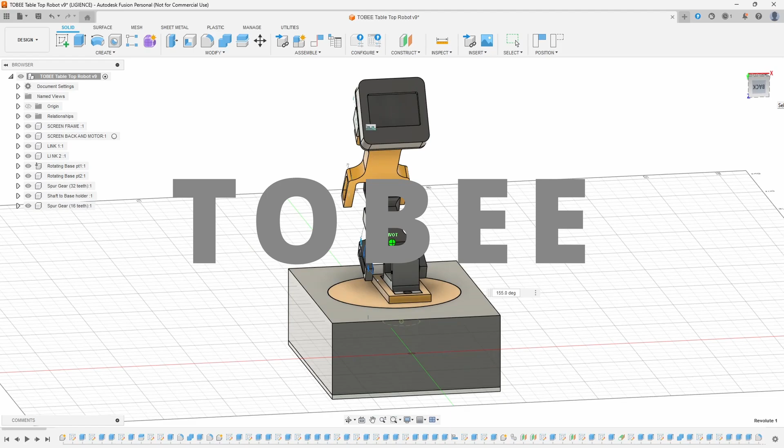Presenting TOBEE, your tabletop robot. Not yet in the flesh, of course. I initially wanted to build my very own Emo robot, but after some financial and part availability constraints, I decided to chill out on that for now. TOBEE, which is a tabletop companion robot, is designed to be a 2 degrees of freedom robot with a rotating base and a screen as an end effector.

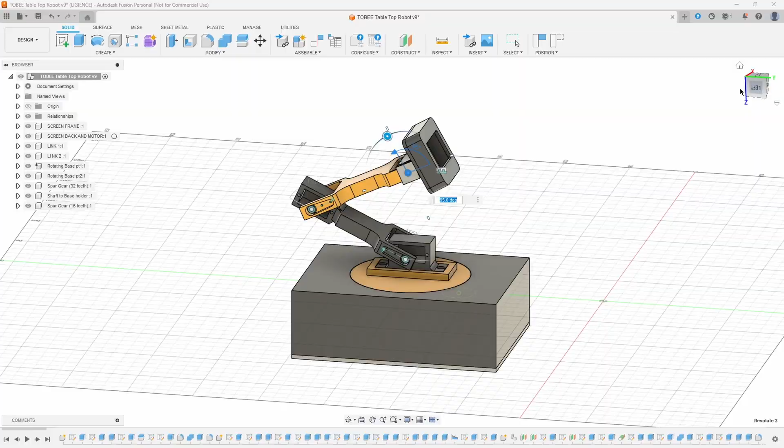TOBEE will have either eyes that react to the controls you manually give to the robot, similar to the Emo robot, or you could also just program in your friend's favorite quotes to motivate them, in times of play, I guess, with the robot.

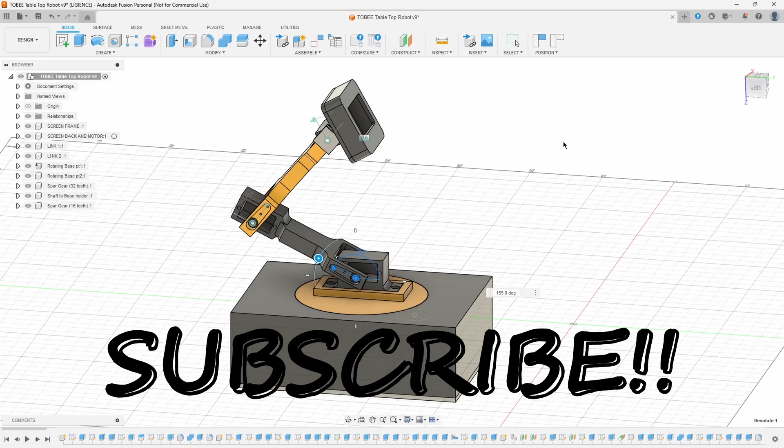Now that TOBEE V1 has been established, let's go over design considerations and constraints. Starting off the project, I made a hand-drawn draft detailing the joint positions and considering the materials I'll need. I ended up with this crappy looking draft and started working with that.

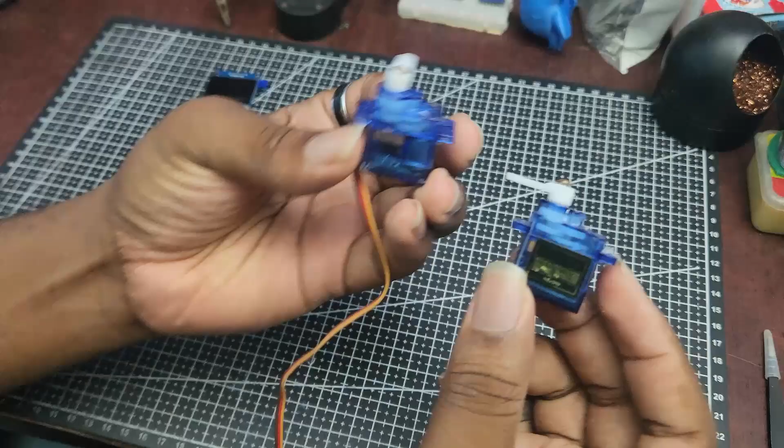In order to have a valid design, I laid out all the different components, which included a 1.3-inch OLED screen, 2 N20 motors, one for the rotating base and the other to rotate the screen, 2 SG90 servos to actuate the joints, an Arduino Nano ripped from an old project remote I made a long time ago, 4 potentiometers,

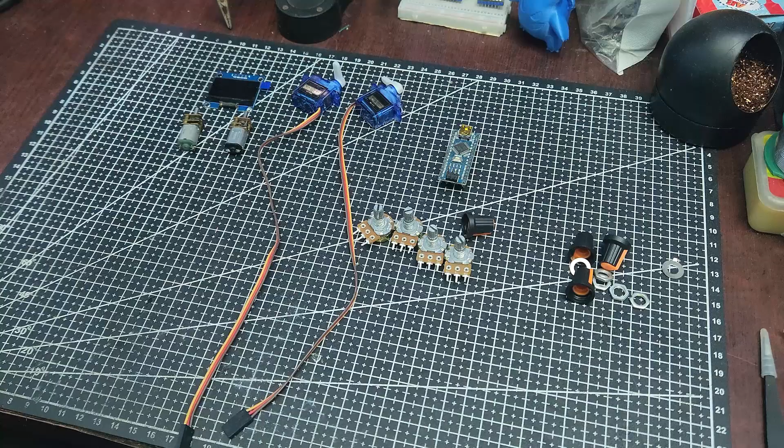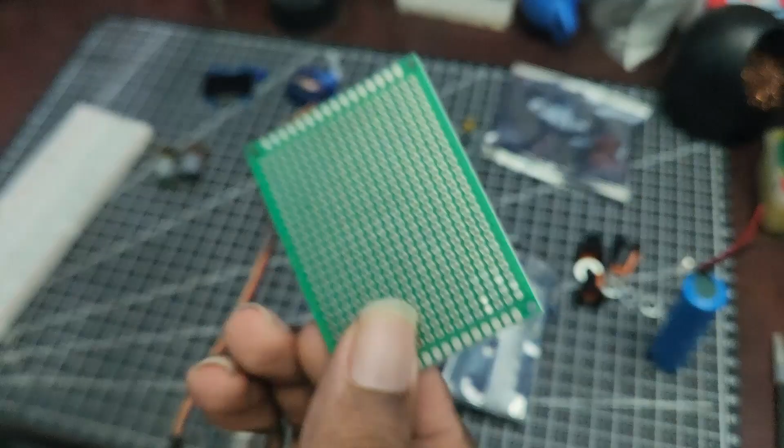an L298N small form factor motor driver I had laying around, a Type-C port, a charge and discharge module for the LiPo battery, a switch, a small piece of Vero board, some servo connector wires and some headers.

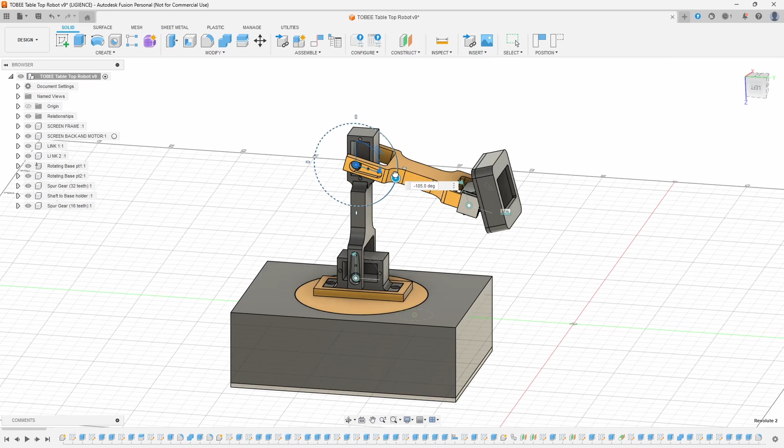With this sorted out comes the next problem, of course, the design. Normally I would design test parts, print them and then use the measurements for parts that fit to design the actual final product. But instead, I went ahead and did the final design. This was with the intent that I could just adjust the dimensions after I print the part in case it didn't fit and I would just be okay. Foreshadowing, let's see. Nonetheless, I popped open Fusion 360 and got to work.

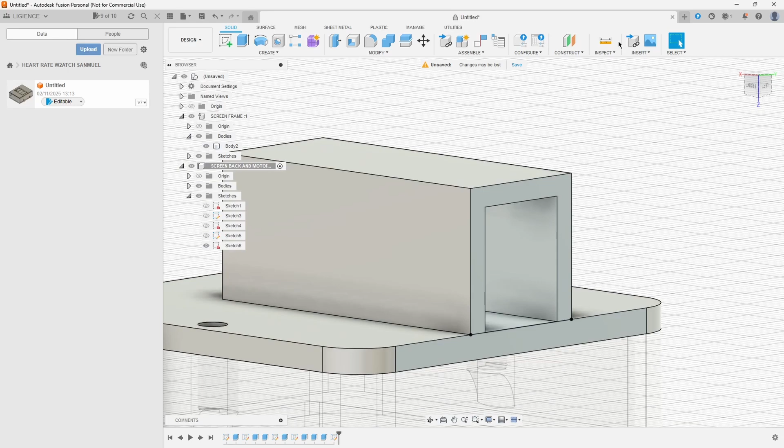I started out by measuring the components' dimensions and making my 2D sketches. I created the components starting from the screen holder, which is screwed on a back plate that had a slot for the N20 motor that would move it. At the back of the N20 motor slot, I created a cover that would also have a print-in-place joint to work with the whole screen movement mechanism.

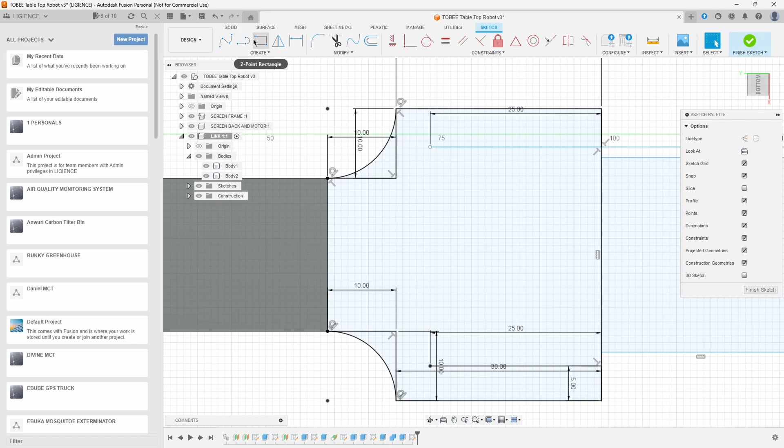I progressed to designing the first link that will connect the motor to the end effector screen. And yes, I love me some symmetry and curves. At the end of the link, I added the motor mounting section and made the second link also in a similar way.

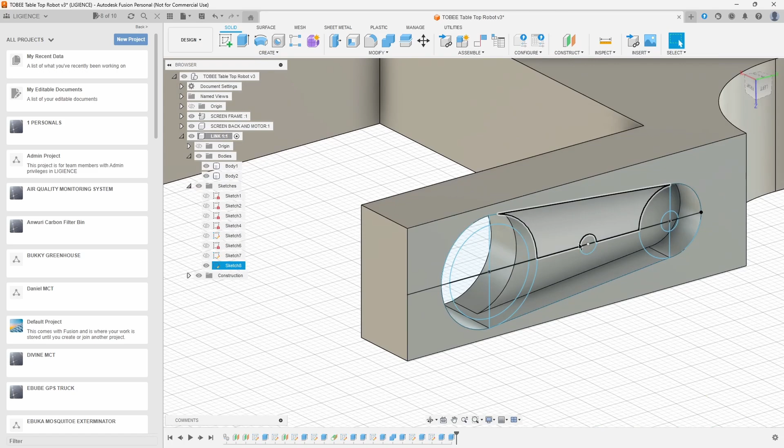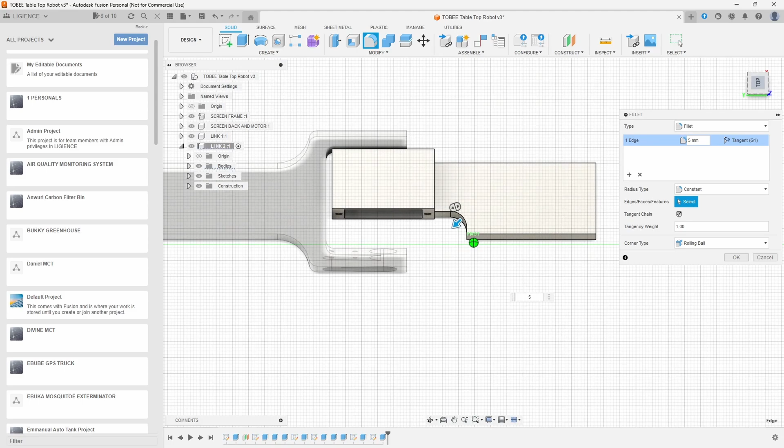The most annoying part of designing the links were the motor mount and shaft mounting sections, due to the difficulty of the dimensions from the SG90 servos. But after looking up some datasheets online and adding my own measurements, I arrived at this. With the second link quickly done like the first, I added another motor mount and attached it to a round plate. This would rotate at the base.

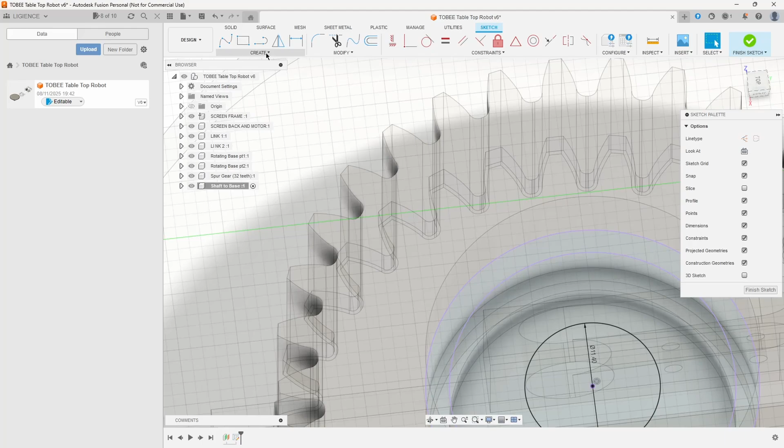To make the rotation work, I added 2 gears with a ratio of 2:1 so I can get double the torque from the N20 motor. I designed a shaft that would hold the bearing on the large gear for smooth rotation, and I also designed the mounting section for the N20 gear motor.

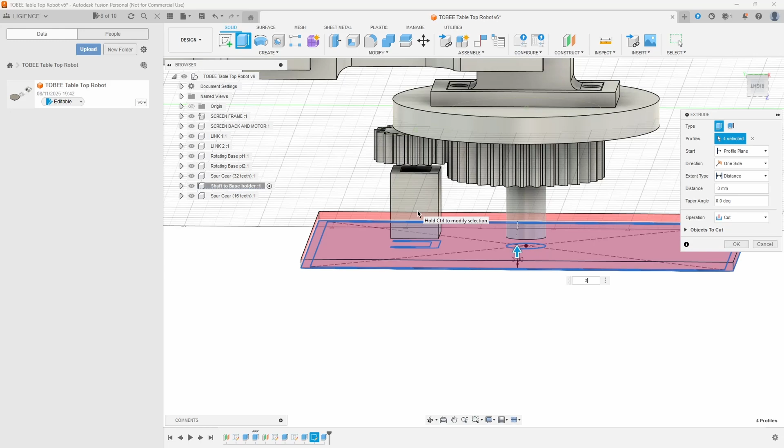With those parts done, I made a cutaway section where the potentiometers will be housed, similar to a control box, which was housed in the overall full base for all the electronics.

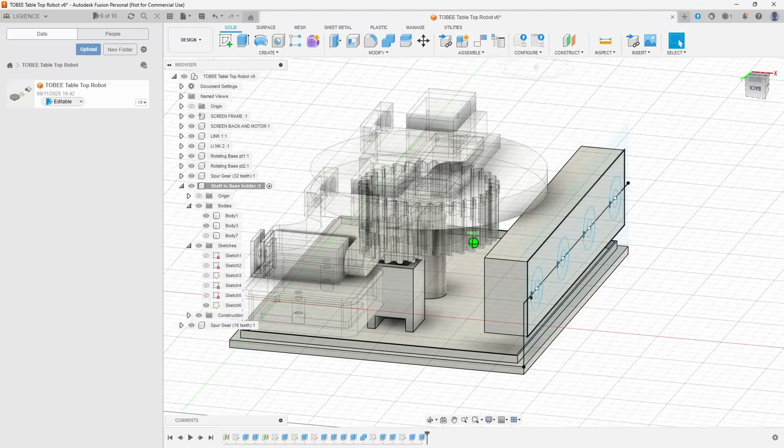Now, I'm aware the wiring holes aren't done, all the parts aren't designed for 3D printing friendliness yet, and parts like the Type-C port and a lot of other things like the rounded edges are also missing. But by the next update video, you should be seeing an actually done TOBEE, fully working in the flesh, or rather in the plastic.